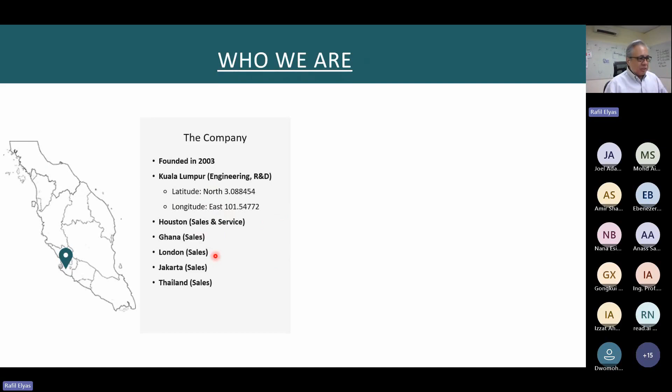We've got agents and partners all over the world. We've got a sales and services office in Houston. You've met Ebenezer, who is from EBL. We've got partners in London, sales agents in Jakarta and Thailand as well for Southeast Asia. So we're a very small niche company. Again, we focus primarily on simulation-based services. We've got about 15 people in the team. About 11 of us are process engineers. The rest are sales as well as general office support.

So our focus areas tend to be within process engineering, particularly process simulation related services. We occasionally do some software development, and we do some machine learning and AI. I like to think that East 101, with our domain expertise, brings some RI into the AI, i.e. some real intelligence to the artificial intelligence. So we do some AI solutions for our customers, but what we bring along is domain understanding and domain expertise in how facilities are operated and designed.

So when we put together our solutions, it's not just doing advanced statistics or neural net type of solutions, but we actually bring in some of the engineering understanding underpinning these AI solutions that we provide. Okay, so just a bit of an overview of some of the work that we do, and you'll see some of these examples very specifically.

For the upstream business, we do quite a bit of controls studies for offshore platforms and FPSOs. We've done quite a bit of work for MODEC, and back in the day, I guess Tullow was managed by MODEC, so we've done a bit of work for the Tullow facility. We've done quite a bit of work for MODEC and Petrobras in Brazil. So there's a lot of FPSO kind of work that we've been focusing on, and it generally is aligned with controls, particularly compressor surge analysis. So we'll be going through one of those examples later.

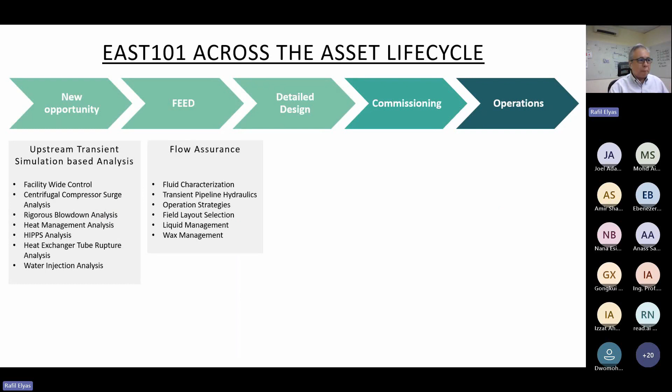I'm just going to run through this real quick because I don't want this to turn... I promise you, this isn't a sales pitch. Just wanted to get you up to speed with some of the stuff that we're doing.

Operational excellence. One of the things that we've been working on quite a bit is machine learning and AI solutions. So we've come up with some AI solutions to help facilities with controls, process controls, primarily looking at flagging and identifying control anomalies. As you know, when you go into a facility, you might have hundreds or thousands of controllers, and you want to be able to identify potential issues, and you can tell by patterns.

If you have, for example, a sticky valve, you have systems where there's a lot of dead time, you have a lot of second order behavior. So as an engineer, as a controls engineer, you can look at that and say, okay, that's anomalous. But try to do that over several thousand controllers, and it becomes quite a task. So we've put together some AI tools to be able to identify anomalous controllers.

And we're going to the next phase where we're looking at coming up with potential root cause analysis to kind of drill down and figure out what's wrong with some of these issues. So it combines some neural net AI with some physics-based model, as well as some real intelligence, some of our many years of experience designing and operating facilities.

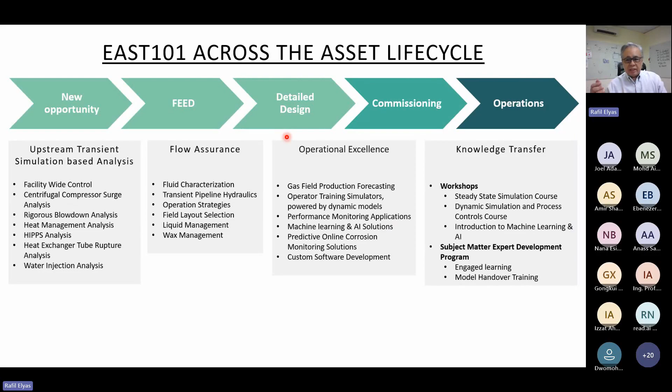And as Ebenezer mentioned earlier, I do a lot of workshops. So we do in-house classes specifically for companies. Occasionally we do public classes. Last year I did a one-day public class open to everyone in Kumasi University. I also teach in a couple of universities here as an adjunct lecturer. That's a bit more theoretical for students.

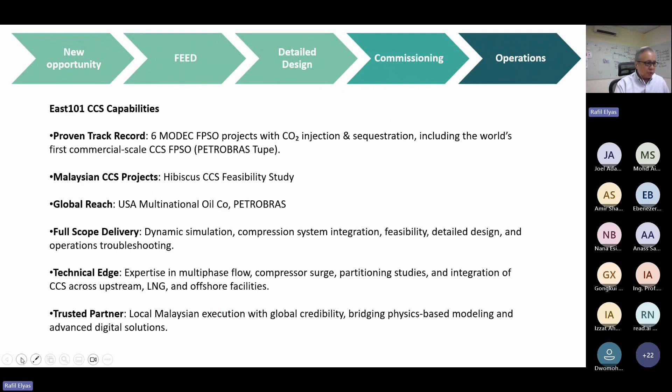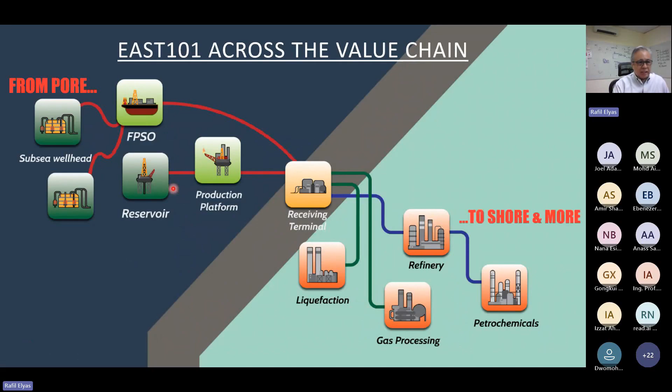With regards to the East101 services across the hydrocarbon supply chain, when I first started my career, I did a lot of work in refining, gas processing, LNG, and petchem. This is back in the 1990s, so you kind of know how old I am. My first job was in 1990 when I worked for Petronas. When I started East101 in 2003, I pivoted upstream because I couldn't really get too much work downstream. So that's where we developed a lot of our experience for multi-phase fluid flow and compression. And lately, obviously, carbon capture and storage.

So today I'll be talking primarily about some of the upstream solutions, but we've actually done quite a lot of work downstream as well. The AI work that we've done is for a liquefaction facility, and we've done quite a bit of work in design and troubleshooting for refineries within Malaysia, as well as refineries in the US and Canada.

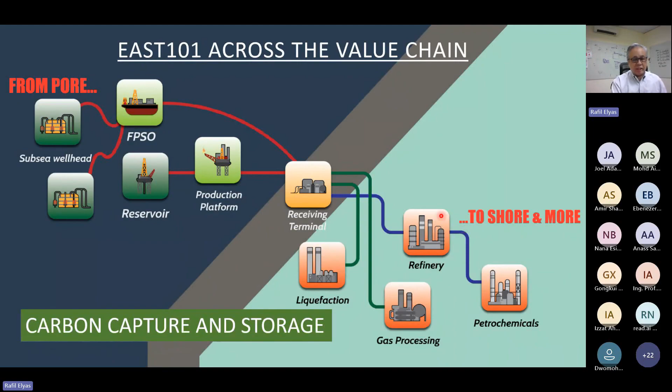Okay, so that's enough of the introduction, and let's talk a bit about some of the engineering technical work that we do. So today I'll be talking about 5 areas that we typically work on. The first, this is pretty much like our rice bowl. This is where we do a lot of our work in. It's centrifugal compressor surge protection and controls analysis. I'll give you an example of what we do there. Heat exchanger tube rupture. This is for shell and tube exchangers. I'll be talking about liquid surge and water hammer protection.

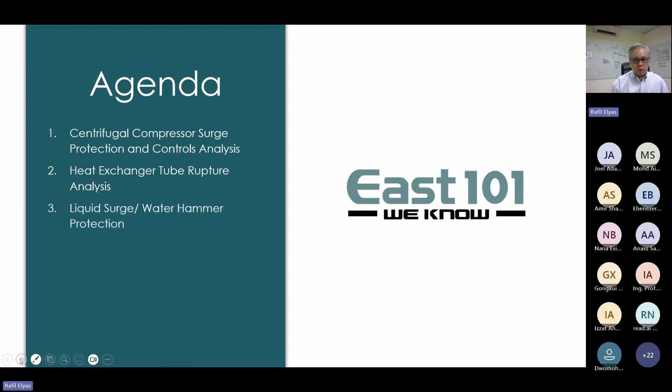Blowdown. So I think most process engineers here have done some kind of blowdown analysis, either using HYSYS or Unisim blowdown, where you actually have to sum everything up into like one volume and kind of blow down that particular volume. In our case, I'll talk about what we refer to as distributed blowdown, which is having the volumes, the pipes, all the configurations, so you can tell exactly where your cold spots are.

And I'll talk about process safety time. This is essentially instrumented pressure control. So a typical one that we normally work on is HIPPS, or high integrity pressure protection systems, or any other kind of instrumented pressure protection control.

Okay. Ebenezer, is everything okay? Can you still see and hear my presentation? Yeah, everything is okay. Okay, I'm going to stop periodically and check, because I've had situations where I got disconnected and then I end up talking to myself for like 15 minutes before I know I'm disconnected.

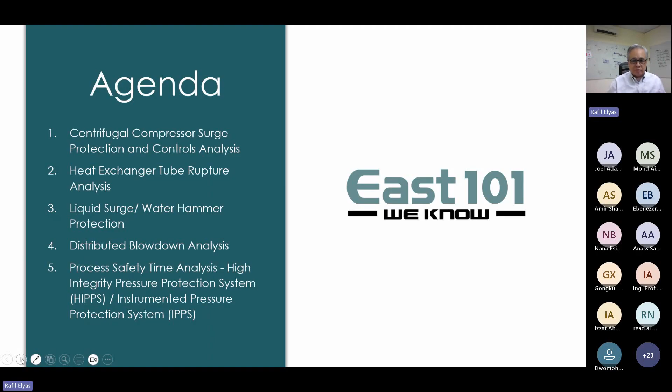So, okay, the first thing I'd like to talk about is compressor surge protection and controls analysis. And again, all of these types of analyses here are done utilizing some form of a dynamic model. Not just within HYSYS or Unisim, but other applications as well. And I'll address that as we go one by one through each of these areas.

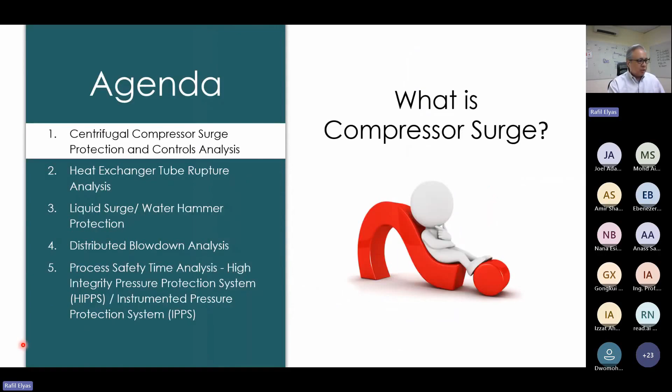Okay, so what do we mean by centrifugal compressor surge? So this is just a quick sketch of the first stage of a typical compression system. And you can see that this consists of piping, an inlet header, in this case, where you might have a PCV to flare. You've got the inlet scrubber to knock out any liquids, your compressor and driver, aftercooler, outlet SDV, and you normally have a check valve over here to reduce your surge volume.

So what do we mean by surge? Well, in some situations, you might find that the discharge pressure may go up. Why would it go up? Well, you could have a problem further downstream. Maybe this is feeding to some other processing trains. Maybe some of the trains have tripped, and it has retarded the flow, causing the increased pressure over here. Could be that maybe there's an inadvertent closure of a valve.

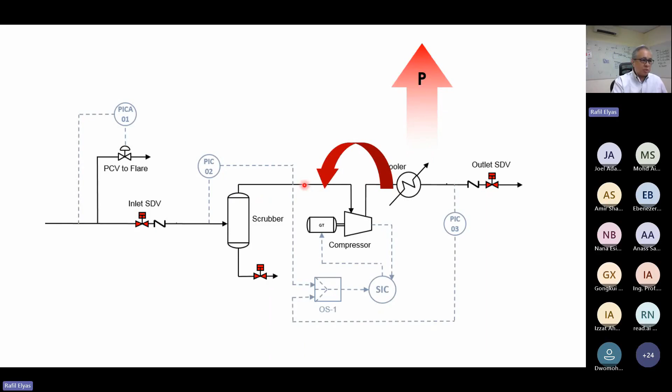So what happens if there's a sudden reduction or retardation in flow? Your pressure goes up. When your pressure goes up, there's a potential for reverse flow. So there's a potential that your gas, rather than going forward, will want to go back. When it goes back, it starts to pressurize your suction, and after the suction gets pressurized, it goes back to the discharge, and vice versa. So you'll have this sort of oscillatory flow.

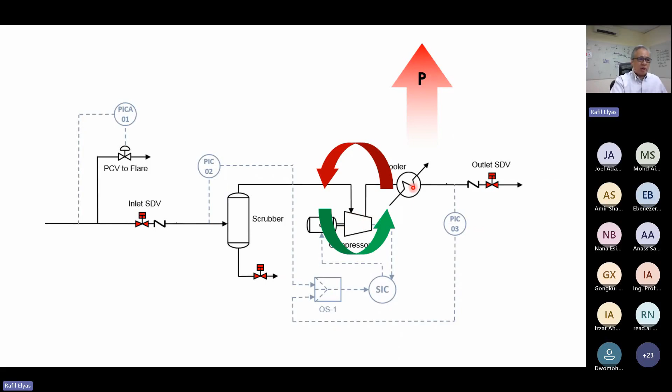Another reason why this could happen is, let's say your inlet flow rate is retarded. Say this is coming from wells and some of the wells tripped. There would be insufficient flow in the compressor. The insufficient flow would also result in this potential issue, where you've got an overwhelming discharge pressure causing a backflow. So this can go back and forth, and this oscillatory behavior can cause mechanical damage.

So what do we do in a situation like this? Well, we need to take a look at certain types of analyses to see what sort of situations may bring a system to surge, where a compressor may start approaching surge. One might be startup or shutdown, particularly if you have an emergency shutdown and you cut the power to your compressor real quick.

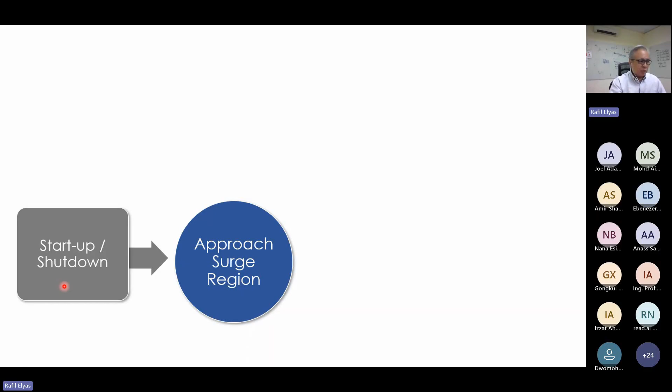You might have sudden variations in demand, like what I said before. Your compressor might be feeding several processing trains. Maybe one train might trip, or some of the trains might reduce in pressure. There might be a turndown. You might also have a situation where you switch compressors in and out of service if you've got parallel compressor trains, or you have two trains and one train trips.

Now, when the surge happens, it can occur within the order of magnitude of hundredths of a second or milliseconds. So you have to be careful in making sure that you have some protection in place to prevent this from occurring.

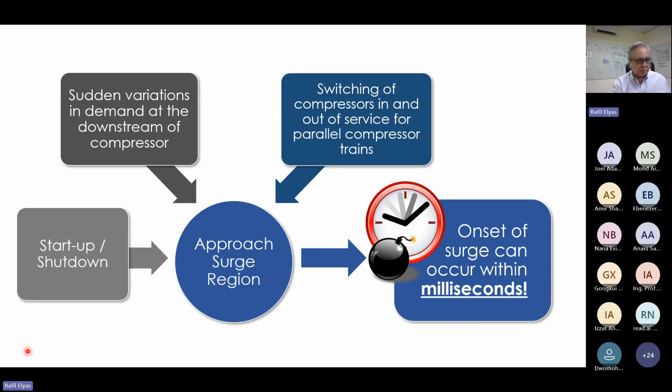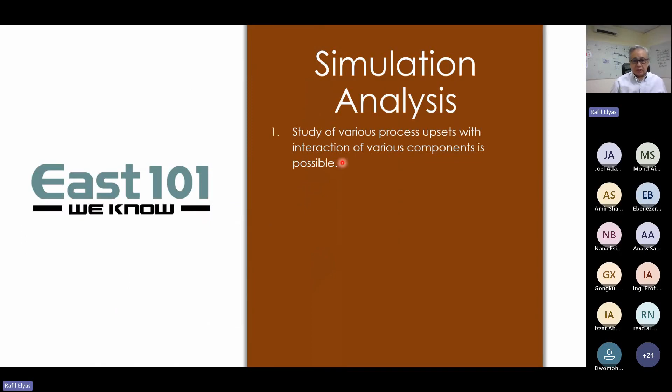Okay, so with regards to the simulation analysis, what we typically look at is various types of process upsets, like what I'd talked about earlier in the previous slide. And we'll take a look at these particular areas. So within all the things that can happen in a compressor, these 3 items here are typically where you might have a potential surge analysis. So we typically set up a dynamic simulation and define these types of events.

You can schedule a bunch of these types of events in any of your flowsheet simulators, HYSYS or UniSim or Petrosim. And we take a look at how well the anti-surge or the surge protection system is designed in order to prevent surge or to prevent any kind of high pressure excursion from occurring.

Okay, so now in order for us to take a look at this, you may be familiar with these compression systems. In order to prevent surge, in order to prevent backflow going through the compressor, you would have an anti-surge line bypassing the compressor and sending the gas back to the suction so you can maintain the flow, smooth activity. Now, there's a couple of questions that people typically ask at this stage.

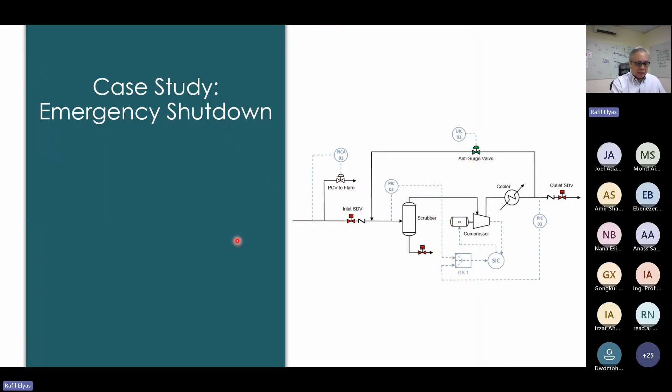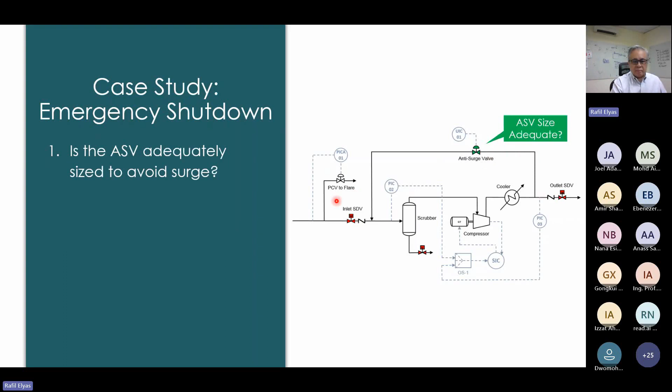One is, this system here, is the anti-surge valve adequately sized? Is the piping also adequately sized? If it's not adequately sized, then do I need to install another valve to allow the flow to come back? So in this case, this is a hot bypass valve. This valve takes the flow before the aftercooler and sends it back. Why is it important? I'll show you in the next slide why we have hot bypasses.

Can I install a hot bypass in order to get more flow back if the individual anti-surge valve is insufficient? It may be sized sufficiently, but it might not be able to open fast enough. And we'll see why that's the case in the next couple of slides. Instead of a hot bypass, maybe I can just have a piggyback or a cold bypass over here.

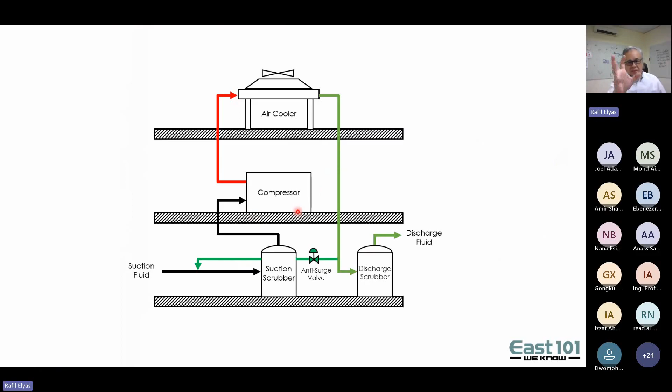Okay, so earlier I just showed you a simple schematic, but if I put this in a very simplified GA, a general arrangement drawing, you can see that sometimes if you're on an offshore facility, your equipment might be on different decks. So your suction scrubber might be on one deck, compressor on another deck, and your hot discharge has to go up. If it's an air cooler, it's normally going to be at the top deck. So it's going to go all the way up and then come back down again. So you've got a fairly long path.

So that's why sometimes you might want to bypass the air cooler and shortcut it with a hot bypass. So a lot of times the effectiveness of the anti-surge system or the anti-surge loop is going to be a function of this arrangement as well as all of the piping and valve sizes.

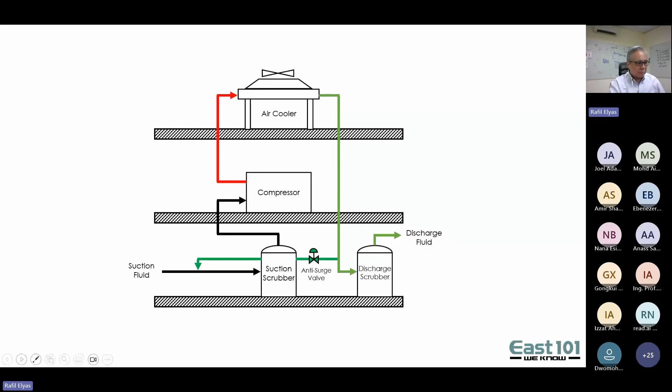Okay, so one of the things that we typically look at in order to determine whether or not we need a bypass is a compressor emergency shutdown. Emergency shutdown tends to be the most onerous case because your compressor is running under normal speed, and suddenly you have a trip, maybe there's a blockage or a system trip or an H2S alarm trips the compressor.

If it's a motor-driven compressor, then you essentially turn the motor off and the compressor just winds down based on its inertia very, very quickly. And as it winds down, it doesn't have enough head to push against the system head, and the system head overwhelms it. So during the emergency shutdown, there is a potential for surge to happen.

And even though you have an anti-surge valve, because the power cuts off very, very quickly, sometimes the valve can't open enough to give you enough CV to have the flow come back. So you have a backup valve or a fast-stroke valve, a valve that you can just actuate very quickly, just open it fully in a short period of time to allow the recycle flow to go back.

So this is an example for a compressor shutdown. I've got some of the details over here in terms of the suction conditions and the discharge conditions. And initially, the proposed ASV, anti-surge valve, size is about a CV of 350. So we want to know whether this compressor is going to surge during emergency shutdown.

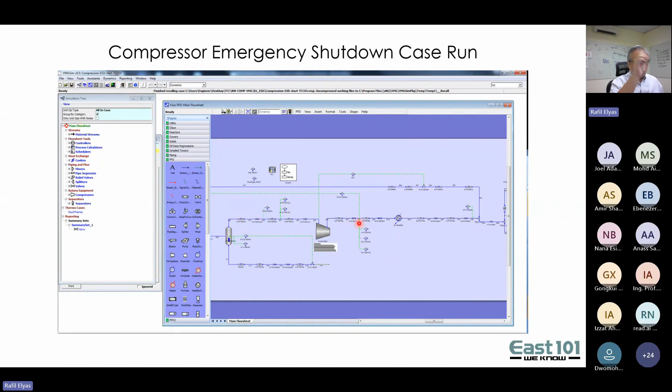So I've got this compressor, this suction scrubber, compressor, valve, and you can see here I've got the aftercooler and anti-surge valve over here. And I've got all the piping modeled. So typically when we do these models, they're very rigorous. We've got all the piping configured. And this is the compressor map. You normally get this from the vendor. So we've tried this analysis.

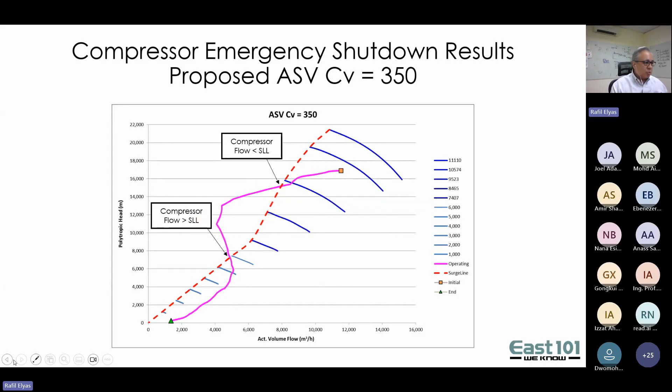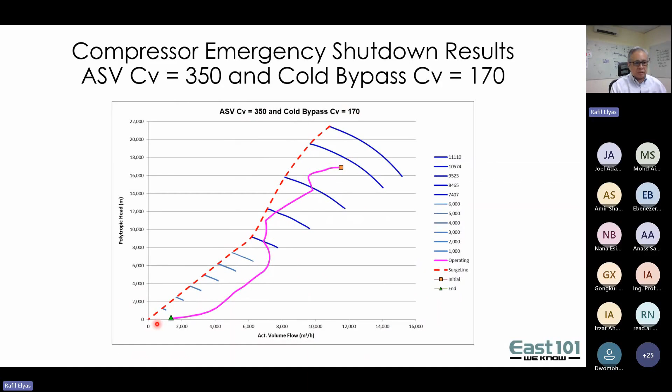So what we've done now is we've put in a cold bypass. So in addition to the 350 CV, we've added another 170, and we find that in this case, that prevents the compressor from entering the surge region. So analyses like these are really important because now you can see a difference. Without the bypass valve, you have a surge, and with the bypass valve, that's able to keep your compressor within the desired operating region as it winds down nicely.

So these simulations have essentially allowed us to get some insight and ensure safety and costs as well by making sure that we prevent the compressor from experiencing any potential mechanical damage and vibration.

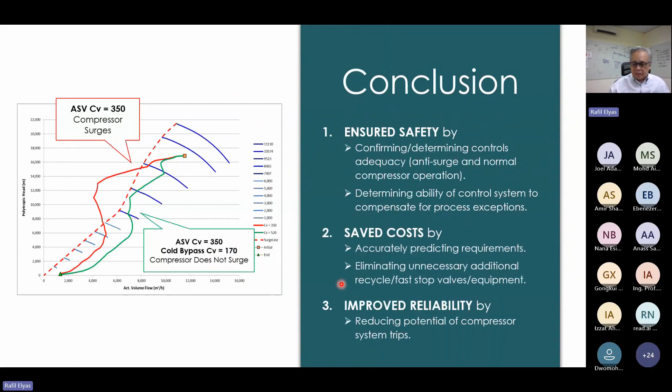Okay. So Ebenezer, is everything okay? Is my audio and visual still up and running? Everything is perfect. We are with you. Okay.

So this is another compressor study that we've done. Sorry, I didn't introduce the previous case properly. That case was for a design case. We did this in a detailed design stage for one of our customers. This next example is for an existing facility. So it's a compressor controls issue. This one doesn't have anything to do with surge.

But what was happening is this is a gas compression module. It's essentially two parallel trains, each with 3 stages: low pressure, intermediate pressure, combine back, go through a glycol dehy, and then into the third stage. This will be going into gas injection and gas lift.

So one of the problems that they saw over here was inconsistent readings for some of these compression trains. You can see that the flows over here seem to be imbalanced. You've got more flow in one, less flow in another, and the flow rate readings were kind of all over the place. So the flows were maldistributed across the compression trains.

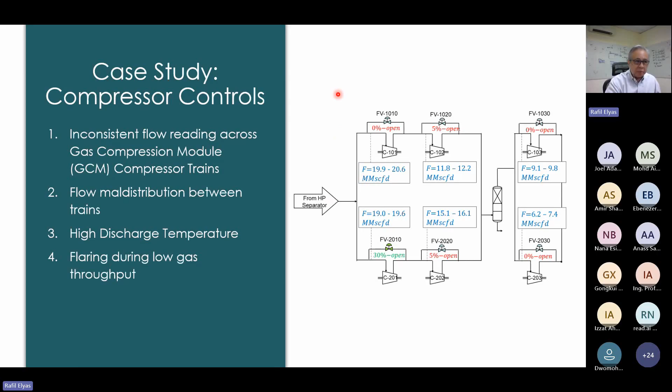And one of the compressors was having a high discharge temperature at this point over here. I think the expected discharge temperature should have been about 140 or so. We were getting up to about 170, 180 at this point. And at the suction header, even at a low gas throughput, we're getting a lot of flaring taking place. Yeah. Okay.

Now, again, we built the simulation model. This was coupled with the offshore site visit. So the engineers went offshore, took a look at some of the setup over there, and made some observations. Had some ideas and hypotheses, and came back and tried running those hypotheses through the simulation model.

Yeah. So for the simulation analysis, we had 2 offshore site visits, got a lot of data from PI. Then we made some observations offshore. Then onshore, we built a rigorous dynamic simulation, validated it against the actual design of the facility, and based on that, we can see what the system was designed for and how it was currently performing. So we could use that to identify certain gaps. Yeah.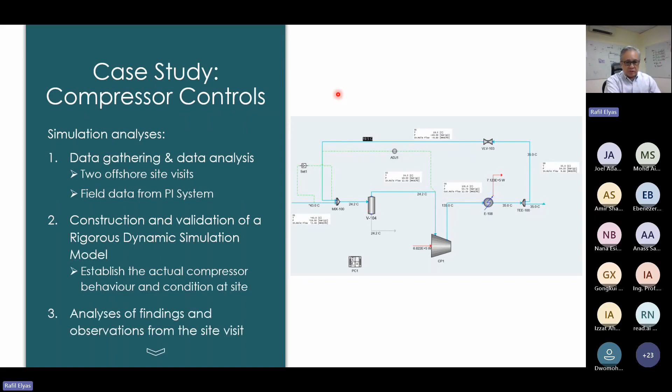So we then performed analysis of the observations from the site. We also did a bit of anti-surge analysis, but that wasn't really much of an issue in this particular case. Yeah. So here's a finding that we got. One of the reasons that we had maldistribution between the trains was one of the anti-surge valves, even though it showed it was closed, it was actually passing. We noticed that on the discharge of the valve, the piping, there was condensation, which indicated there's flow because you get a Joule-Thomson effect. From high pressure to low pressure, it gets cold, and the piping was cold, and that's a bit odd. So we shot it with a temperature gun.

So we're in Malaysia. The temperature is about similar to Ghana. That's one thing I noticed when I went to Ghana. The conditions, the humidity, was almost exactly the same as Malaysia.

So the ambient temperature is going to be about 30 plus degrees Celsius. But when we took a look at the discharge of the ASV valve, which is supposed to be closed, it was about 12 degrees Celsius, and there was condensation around it. So we found later that the ASV, the anti-surge valve, was passing. Even though the indicator showed that it was closed, it was passing, and it was causing a recycle to occur in one of the trains. So it was retarding the throughput of one train, so there was more throughput going through another train. So that caused a lot of the imbalance.

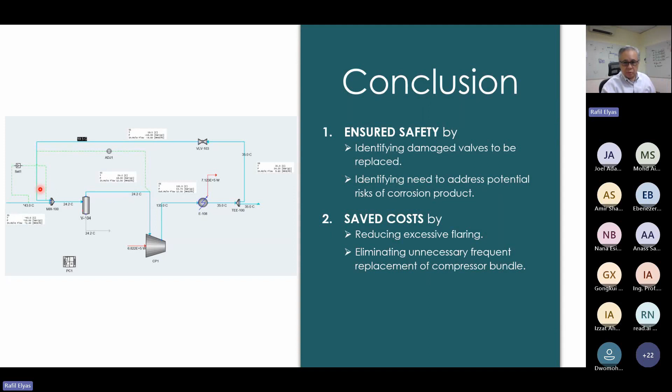Yeah. So we essentially identified the damaged valves to be replaced, sent that out, and wrote a report about the corrosion. Initially, the CO2 levels were supposed to have been lower for the system. So the material that was selected, carbon steel, did not have the resiliency to deal with corrosion. So the other solution, albeit a very expensive one, was to change out certain sections to prevent corrosion. Yeah. So this is one of our operations troubleshooting cases. Yeah.

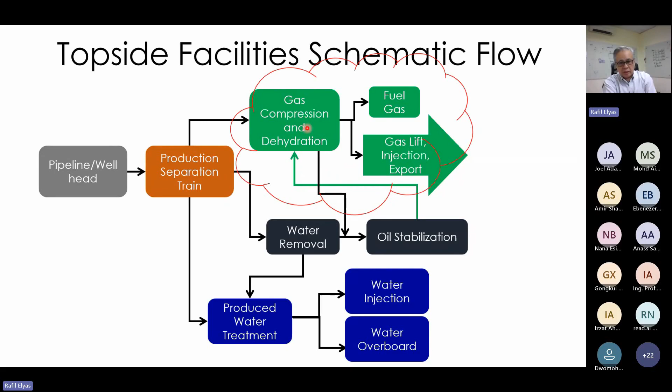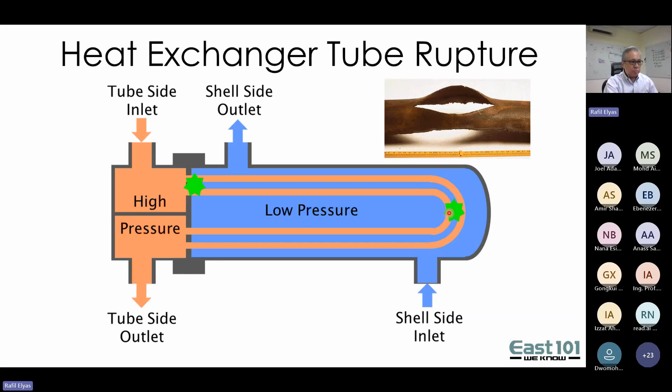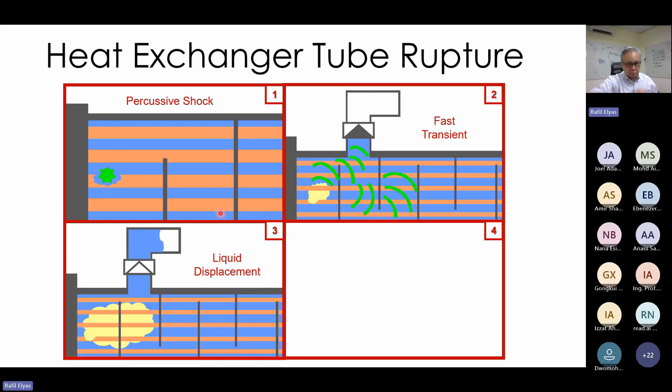Okay, so if you take a look at the dynamics of a tube rupture, the first thing that happens is you see a percussive shock. As soon as it breaks, you've got your high pressure suddenly entering a low pressure system. That percussive shock generally is extremely fast. You have a pressure wave that travels at the speed of sound in whatever liquid you have. And that high pressure is followed by a liquid displacement and later by gas breakthrough. So when you're designing these relief systems, you need to take all of this into account.

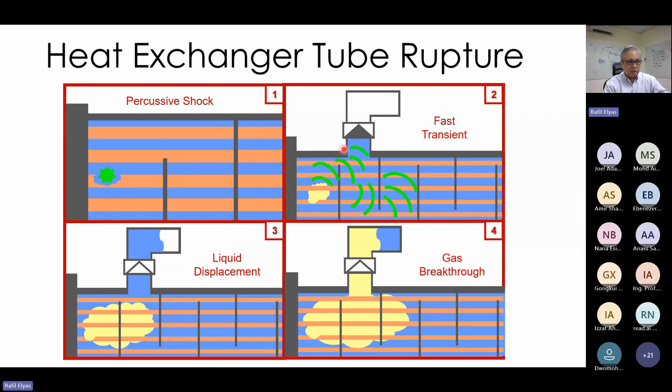The fast transient, how fast is this? Can I use a relief valve? Do I need to use a bursting disc, or can I use a buckling pin configuration? All of those have different transient responses associated with them. What kind of protection can I use? How big is it, and where do I need to place it? At the inlet, near here or farther down?

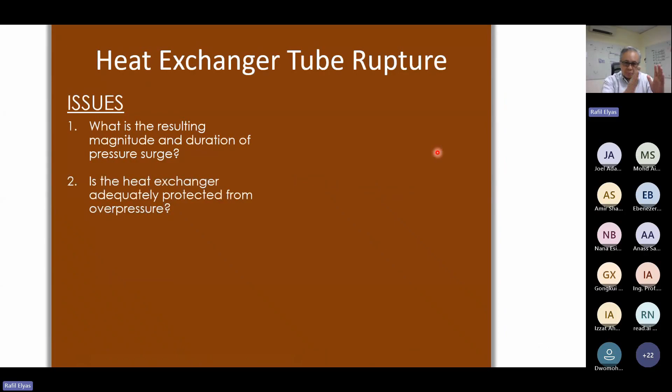Okay. So the first thing we need to know is the resulting magnitude and duration of the pressure surge, and where in the shell does it occur? We want to look at the pressure profile as it traverses the shell. We want to know if this heat exchanger is going to be adequately protected from overpressure, and will this also cause issues with the inlet and outlet piping? So what kind of analysis do we need to do?

Well, we need to do a transient single phase hydraulic computation. And you can't use HYSYS or UniSim or PetroSim or Symmetry for that, because even though it appears that there's some sort of pressure flow interrelationship in dynamic HYSYS, it doesn't include the momentum balance component of the Navier-Stokes equation. If you're using HYSYS, UniSim, Symmetry dynamics, there's only two parts of the Navier-Stokes or Bernoulli equation that are taken into account.

One is the pressure drop driving force, frictional pressure drop: F equals K square root rho delta P, friction or 1 over friction, which is conductance. And elevation, H rho G, static head. But it doesn't take into account the kinetic energy terms or acceleration terms. So you can't use HYSYS for something like this. You need to use a single phase tool like PipeNet or AFT Impulse.

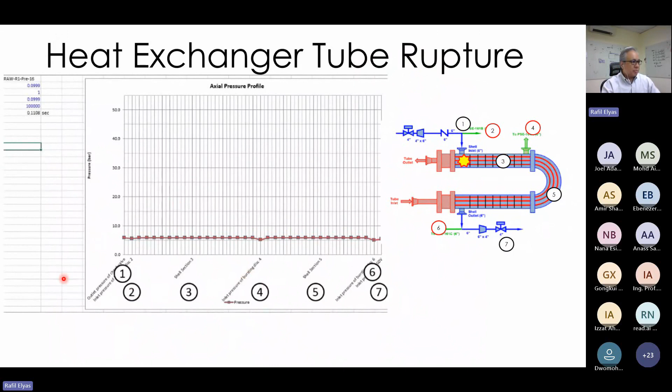So I've got relief valves placed in various locations here as well. I've got a bursting disc. And this simulation happens very fast. If you watch this timing, it's happening within less than a second. So let's see if I can run this animation.

Okay, so I've induced that. You can see the pressure start to move up, and the pressure wave starts propagating across. So it's now the time, it's a really small thing. It's less than a second happening. And you'll see the bursting discs start to lift at some point in time when the pressure reaches that point. Yep, that's lifted, that's lifted, and that's lifted.

So now the pressure wave is going back and forth. You can see again the timing. This is less than a second. That's about a tenth of a second. You can see the wave traversing back and forth across this. You can't see this in HYSYS. So you need to use this kind of tool, or you need some kind of CFD-like tool. You can consider this like a one-dimensional CFD. So that's a wave that's just gone back and forth, yeah? It's just single dimensional, just axial computational fluid dynamics. Okay.

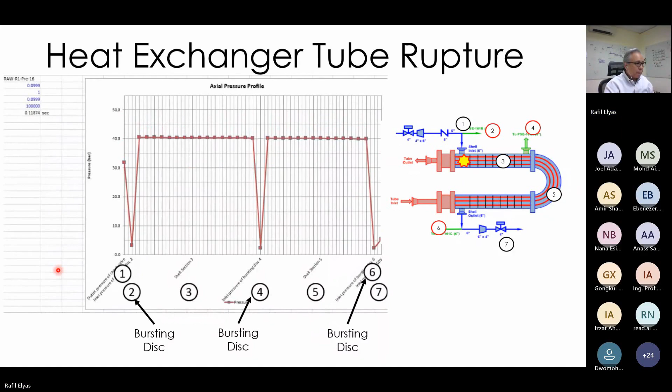So this is what we were looking at from this analysis. We had like a buckling pin valve over here, and one located over here. So initially, in terms of the sizes, we're looking at a 6-inch, and we found that with the 6-inch system, we had some issues. It was not acceptable. We were actually going past the maximum allowable working pressures.

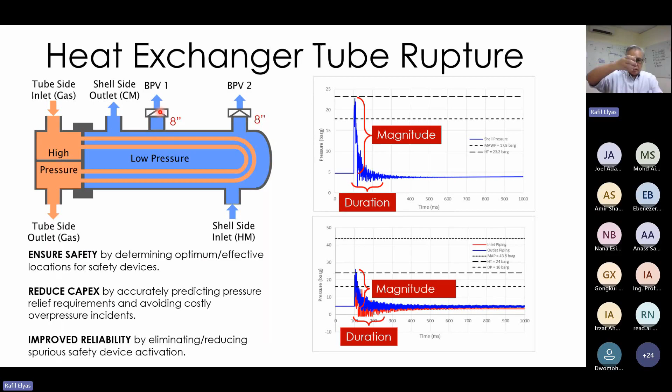So what you get again from a dynamic simulation is magnitude and duration. How much and how long is it going to occur? So by having this, we've been able to determine where we locate these relief devices, and it takes the guesswork out of it, so you can actually manage your capex properly. We also tell you how far these discs, the relief devices, need to be away from the shell. Okay.

Ebenezer, we doing okay in terms of visuals and audio? Yes, I have a question in the chat. I don't know if we would address it now or after. Yeah, I think I'll run through everything and then we'll address the questions.

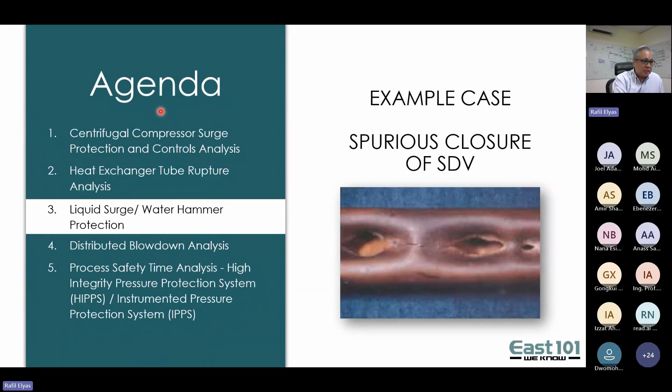Okay. So the next analysis that we did was a liquid surge and water hammer case. And this was for a design case. So again, this is not using HYSYS. For something like this, you have to use PipeNet or AFT Impulse. So in this case, I've got a pump and a piping system. We want to know whether you're going to get liquid surge occurring during transient events: startup, shutdown, sudden valve closures, etc. If there is a sudden pressure surge, is it going to be significant relative to the pressure rating or the flange rating of the system?

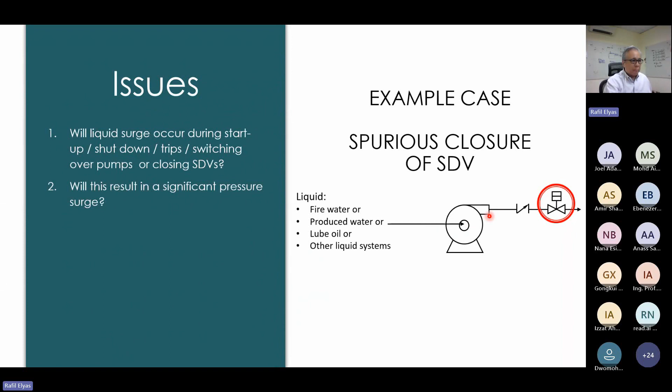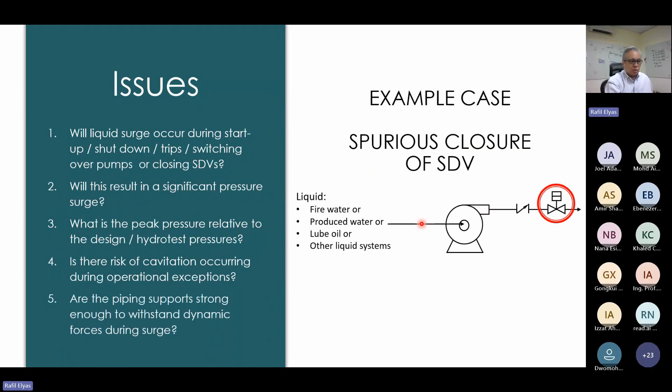So again, we want to know what's going to be the peak pressure relative to your design or hydrotest pressure. Another thing we want to know is there any potential risk of cavitation during the transients? So when I'm starting up, do I have enough NPSH over here to prevent cavitation from happening? I want to prevent the pressure from dropping below the vapor pressure of the liquid. When you have cavitation, you start getting pump vibrations and you trip typically. If there's any kind of pressure surge, are the supports going to be strong enough to withstand the dynamic forces?

So in this case, we've done these cases for fire water, produced water, lube oil, LNG loading. So the issue, you could have a sudden closure or some kind of transient. Typically, you can use some hand calcs, a rule of thumb, to figure out what kind of pressure increase you're going to have, assuming that you have some information on the speed of sound in that particular liquid and sudden deceleration.

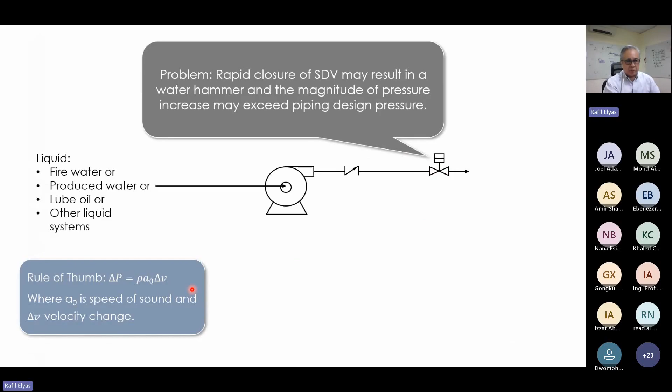So I think a lot of companies will have a lot of spreadsheets, and that spreadsheet will essentially, I think it's a Joukowsky equation, tell you how fast or slow you need to close a valve. And that'll give you a first pass analysis. But later, as your system gets more complex, you might want to have a proper dynamic hydraulic analysis.

So in this particular case, for something a bit more complex, we've got the pump curves, the piping configuration with isometrics, valve data, and we actually shut down the valves, open, close the control valves, switchovers, and things like that. And we take a look at the pressure, potential pressure surges and pressure increases across the system.

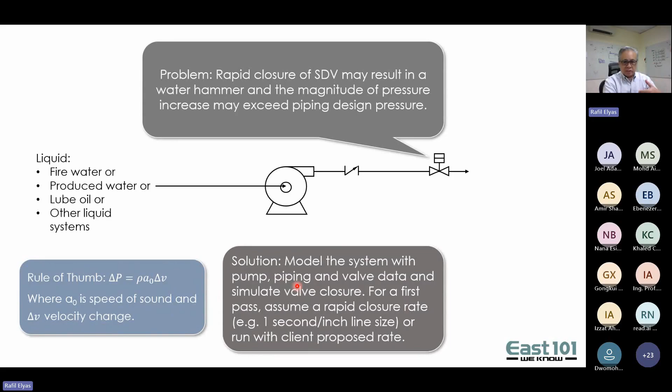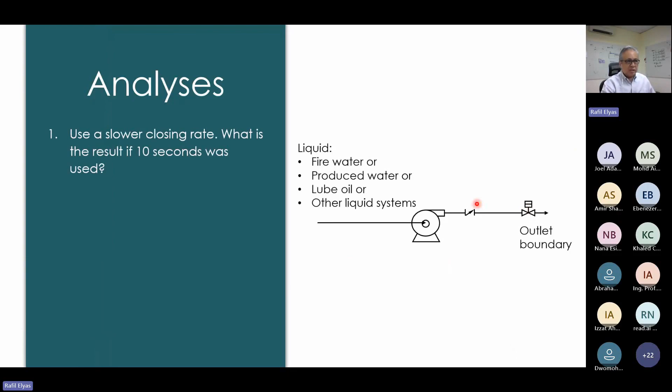So in some examples, if you have a closure and you want to prevent this system from potentially surging, we take a look at what are some of the limits that we can have on the valve closure. If we have a different valve trim, say, for example, linear valve versus equal percentage valve, it's the opposite of a quick opening. It's a quick closing valve.

So in some of the cases, we might have to take a look at the stroke time of the valve. In some cases, if we have an issue, we might have to resize some pipes. We had a recent case where unfortunately we had to go back to the customer and say that we've got some issue on the sizing. We've got some liquid surge issues. We need to revisit the pipe diameters for certain sections.

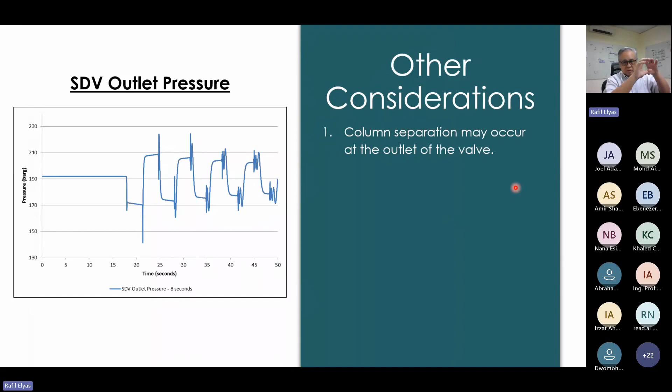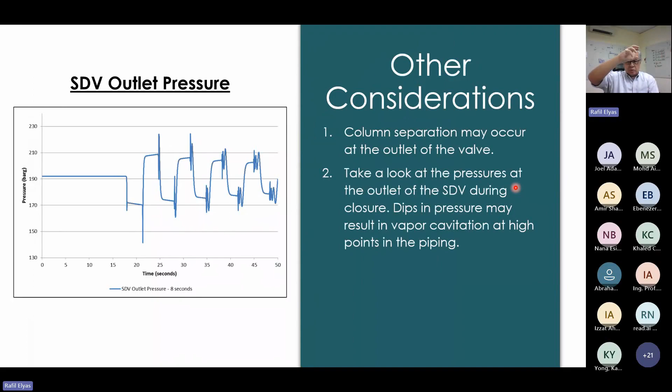So what are some of the other considerations? Sometimes, particularly if you've got overboard dump valves, which we see in a lot of the offshore facilities, as the liquid starts to go to the overboard dump, you might get the liquid separating because of the siphoning effect. And the siphoning effect might cause essentially vapor pockets to occur. And that could also result in vapor cavitation on some of the overboard dump valves.

So I've got a lot of friends who sell valves for a living, and this is something that they're always complaining about, the cavitation on the overboard dump valves. So how do we know what's going to happen? Well, again, we built our simulation using something like PipeNet or AFT Impulse. On PipeNet, you can track cavitation to different degrees of rigor.

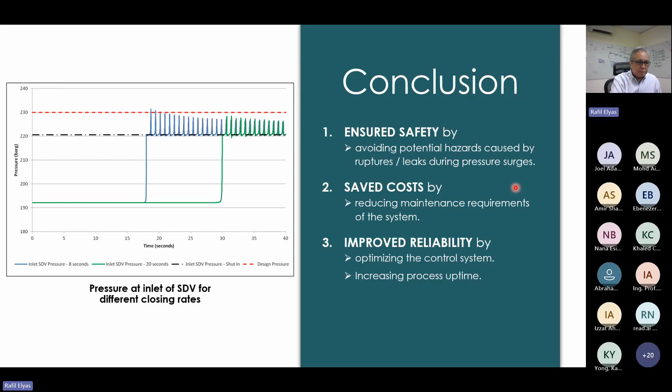So if you use these kinds of transient single-phase liquid systems, you get to avoid a lot of these hazards, and you get to save a lot of costs, reduce your valve cavitation, make sure that you can have proper startup, reduce equipment vibration, etc. Okay.

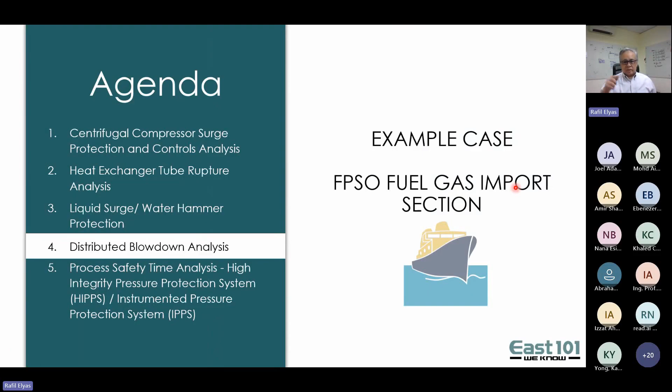So this is another case. This is distributed blowdown. I think most people are familiar with lumped blowdown analyses that they typically have in HYSYS. This distributed case we'll get into. So this is for an FPSO system with a turret and a fuel gas import. In this case, they were importing fuel gas from another facility. I can't remember how far it was.

So if we take a look at FPSO, I think if in Ghana, there's a lot of people working the FPSO business, MODEC, Tullow, etc. And in this particular design, this has a turret. So in this case, it's a rotating turret mooring system. So we have these swivels over here. These swivels essentially provide an interface between the subsea pipes and the topside facility piping.

So what I'm going to look at is the fuel gas import line. I've got the subsea pipeline coming in, the import line going up the riser through the swivel. So this would be one of those toruses that you see here. And going through a superheater and through the fuel gas metering system and then into the fuel gas system.

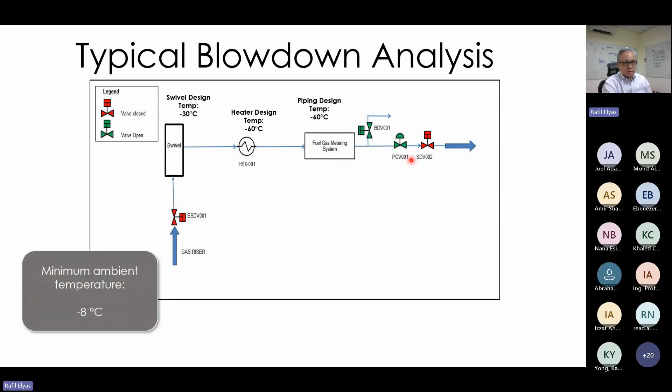So if you take a look, these are the design temperatures. Coming up from the gas riser, the swivel has a design temperature of minus 30 degrees C. But everything after on the topside, after the heat exchanger, is all low temperature carbon steel, so it goes down to about minus 60. Now the minimum ambient temperature is about minus 8. So this was actually somewhere in the North Sea.

If we take a look, the swivel structure is quite complex. You've got certain sections thicker, certain sections thinner. And obviously this impacts a lot of the heat transfer.

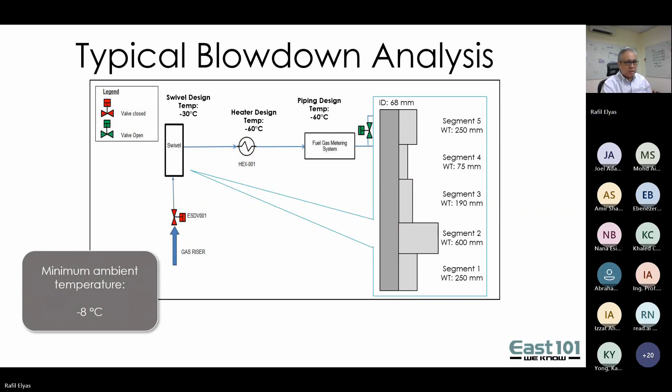So what people typically do in traditional depressuring, if you're an EPC company and you've done any kind of depressuring, is you normally would lump this in a single volume. So you sum up all the volumes, add it to a volume, take a look at the thickness, figure out what is the most conservative thickness, and come up with a metal thickness over here and try to conserve the mass.

So if you're using the tools in HYSYS or UniSim, there are some fudge factors that you can put in to make sure that you conserve the mass. You can add on additional terms and various kinds of lumping tools, so you can lump all of the system here, all the piping, heat exchanger, tubing, etc., into a single volume, which has a single heat transfer area and a single metal mass.

So when the customer had actually done this analysis, they found that everything was essentially settled out to ambient conditions. So it was a shutdown, and everything lined out to about minus 8 degrees Celsius. When they ran the traditional depressuring, the lumped depressuring, they found a minimum fluid temperature of minus 41 degrees Celsius. So this was a bit disconcerting.

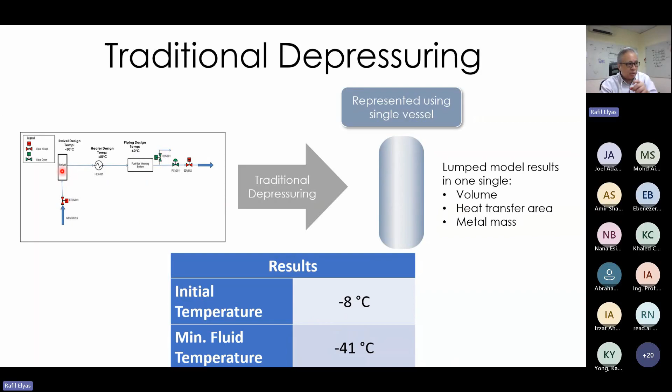Obviously, the inner wall temperature may be higher than minus 41, but this was a bit disconcerting because it's just like a single lump. And you can see that thicknesses are going to vary across here. And if you lump everything together, you can't really tell where that low temperature spot is. If it's happening around here, I don't really care so much. But if somewhere around here, around the swivel, I'm getting minus 41, then I have some issues.

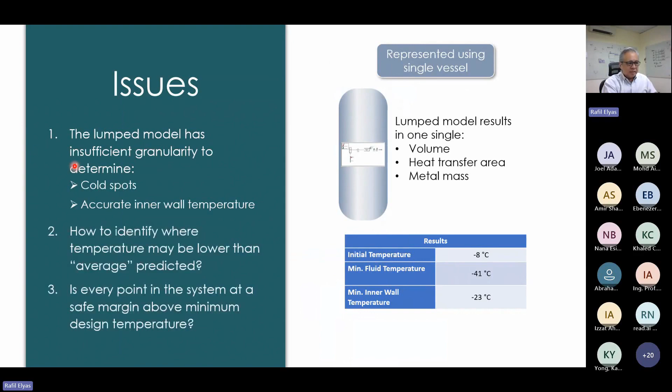So you can't find out where the cold spots are. You don't really know what the inner wall temperature is. So it's difficult to determine whether all the points there are above the safety margin, above your design temperature. So what we did was a distributed blowdown analysis. We actually built it component by component in HYSYS.

Now you're thinking, HYSYS Dynamics, the native tools aren't really set up for rigorous heat transfer. But there's one thing that you need to understand in HYSYS. Each HYSYS object, the pipe objects, the stream objects, are actually programmable. You can customize them. You can actually treat HYSYS like a very expensive MathCAD. So using Visual Basic, we modified some of the heat transfer equations in the piping and the vessels to include rigorous heat transfer models.

So for convective heat transfer, free convection, forced convection, we'd added all of that detail inside. We'd also included a finite element analysis code to look at the wall thickness. So this is all customized. You're not going to find this in any of the commercial software. This is all written by myself and my team. So we have every single piece of piping in there, and the walls were modeled rigorously with our own code. Based on that, we can look at the temperatures, and then we can check the valve sizing as well.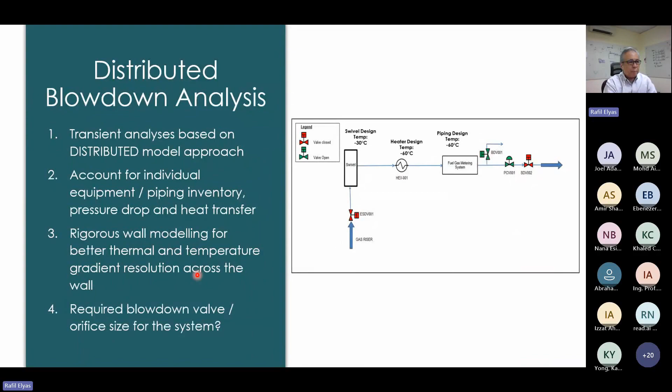Okay, if I take a look at this case, I look at the axial temperature profile across here. So I'm starting off at point 1, 2, 3 all the way up to 8. I'm starting off at minus 8 degrees Celsius. So I have everything shut down, and I'm doing an isochoric settle out at minus 8 degrees C. So I'm letting the system shut down from normal operations, let everything equilibrate to minus 8 degrees C, let the pressure internally equilibrate as well. And let's take a look at what's happening.

So I've got two graphs here. One is inner wall temperature, the other one is fluid temperature. And I'm calculating it for all of these points. Bear in mind, as I mentioned, it's using our own rigorous heat transfer routine. So you can see the depressuring starts. My liquid inventory temperature starts to drop, but the metal temperature still remains above because it's a thermal reservoir. It's still warm. You've got the heat capacity of the metal.

And you find that this is the spot which looks like it's going down to about minus 41, which is actually at this point here, around point 4, point 5. So this temperature is dropping to close to minus 40, but because there's a lot of metal mass around this point, because it's around the heater section, the inner wall temperature is still pretty high. I don't have any issues there. And I'm seeing that over here. I have enough thermal mass to prevent the temperature from dropping too low.

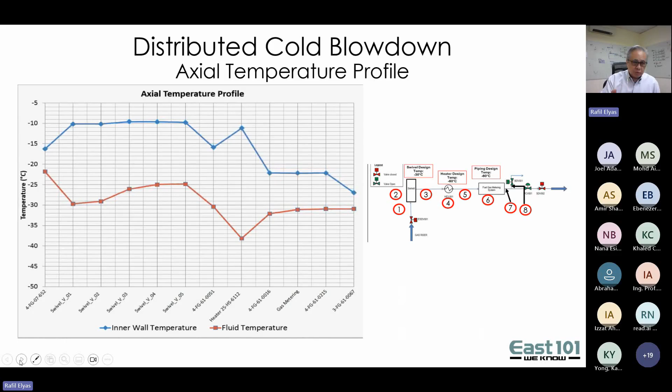So at this point where this is minus 30, I'm pretty safe. I'm way above minus 20 over here. This point where it's minus 60, again, I'm pretty safe here as well. So now you've got some peace of mind. You know where the cold spots are. You don't have to worry too much about having any potential cold spots or fatigue.

Now, another thing that you want to do is to take a look at the cold area to find out the heat transfer across the wall. So for this, I wrote a finite element method. HYSYS doesn't have a finite element method, so this was our own code bolted into HYSYS.

You can start off at minus 8. So I can see the heat transfer going across here. And I start the sim. So this is the fluid temperature dropping, but you can see the metal is still warm. Yeah. As you can see, the fluid starts removing more heat, and slowly this temperature gradient will start to reduce. And you can see that the outer wall also starts to drop.

Now here's the interesting thing. So the outer wall is at minus 8 degrees C. So at some point in time, it starts absorbing heat from the wall, and you start seeing this temperature start to climb a little. Yeah. Now it's kind of dropping because of the rapid depressuring effect. Rapid temperature drop, but now at some point it'll start absorbing heat from the surrounding.

You'll see this start to slow, and you'll see this temperature start to climb a bit. You can see, yeah, so you can see everything start to come up a bit more. Yeah, so it stops about here. This temperature drops a bit, and then it blips up. Okay.

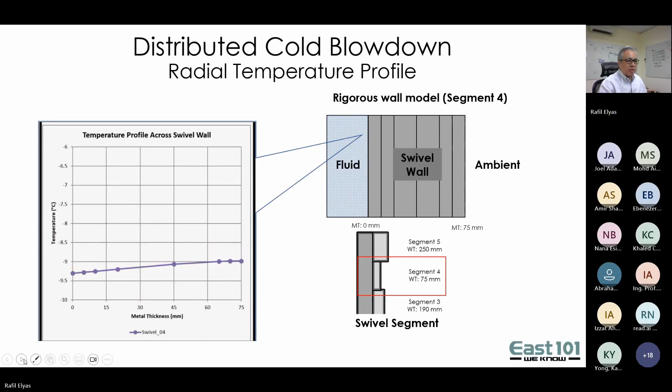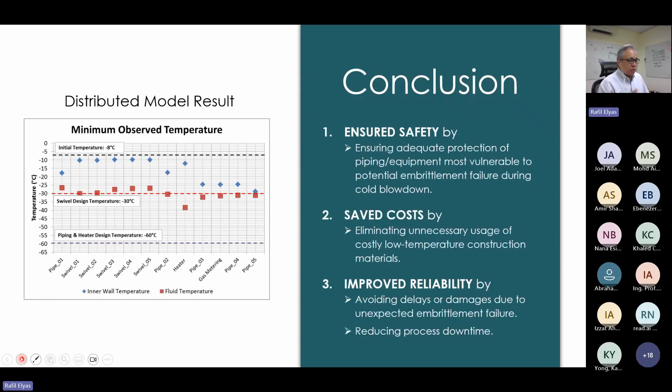So if we take a look at the distributed model, we find that we're pretty safe over here. Yeah, we don't have any issues. Swivel design temperature, these blue spots are all above, no problem, as well as further down. Okay. So we're able to put our customer's mind at ease with the system, with this distributed model as opposed to a lumped model.

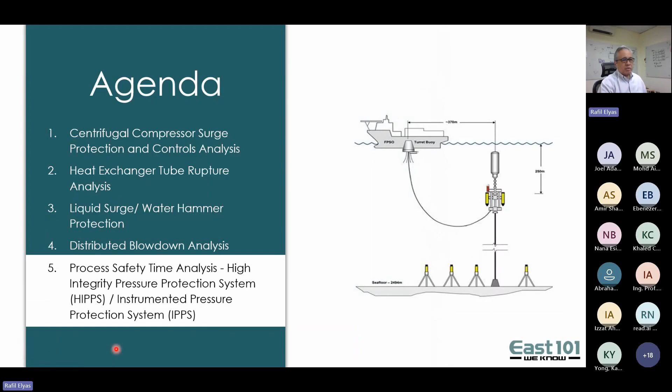Okay. So let me run through the last one. This is for process safety time or a high integrity pressure protection system. So in this case, again, this is for an FPSO. So what happens is a lot of the piping around the transmission or the subsea lines are for a higher pressure rating compared to the topside. Yeah. So we normally have a spec break over here. Sorry, a pressure rating break. Obviously, because your wellhead pressures are operating a lot higher.

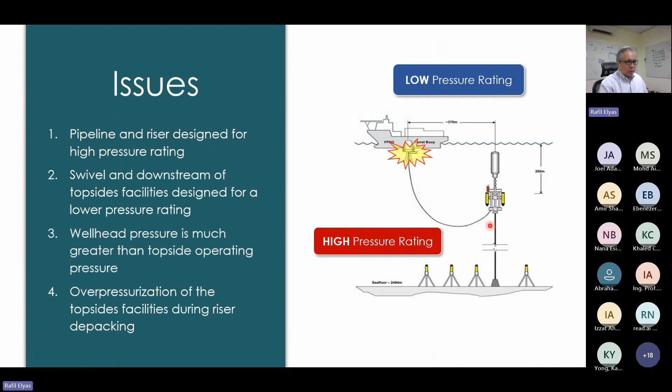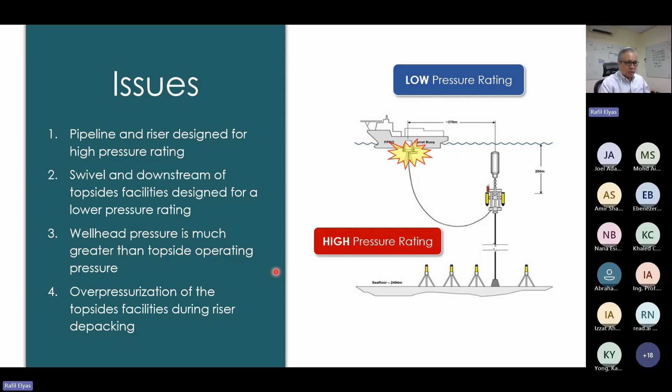So in some cases, let's say if you had a shutdown and you restart the compressor, as you restart your facility, sometimes what happens is within this riser, when you shut down, all the liquids will go to the lower points, and you'll find a gas-packed riser. So this gas-packed riser will be at a high pressure. When you start up your system, or if you open your valves over here, you might get a sudden overpressure during when this riser starts to depack.

So this computation is a bit more straightforward. So we take a look at the peak pressure developed in the worst case scenario. We want to find out how much time we have for the instrumented pressure protection system to activate. We want to know what the set points are, and we want to know what the minimum stroke time for the instrumented pressure protection system valve is. If you have a HIPPS valve, the normal stroke times are going to be about 3 or 4 seconds. Yeah.

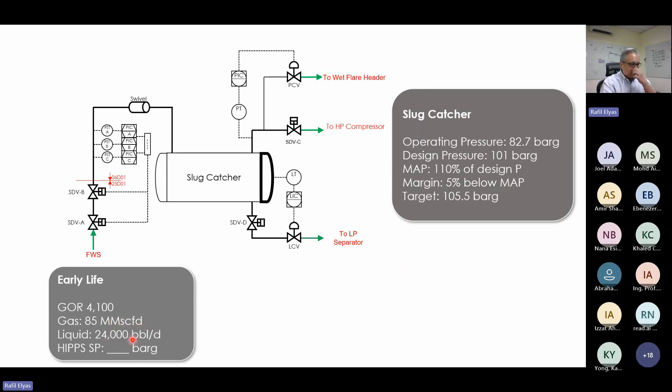So this is the system at early life. So GOR is about 4,100. Gas is about 85 million scf. Liquids about 24,000 barrels. And we want to know for this, what's the HIPPS set point? Later life, we have higher GOR, higher gas flow. So obviously, in these kinds of systems, your pressure is transmitted by gas. So the more gas you have, the faster the system is going to pressurize. Yeah.

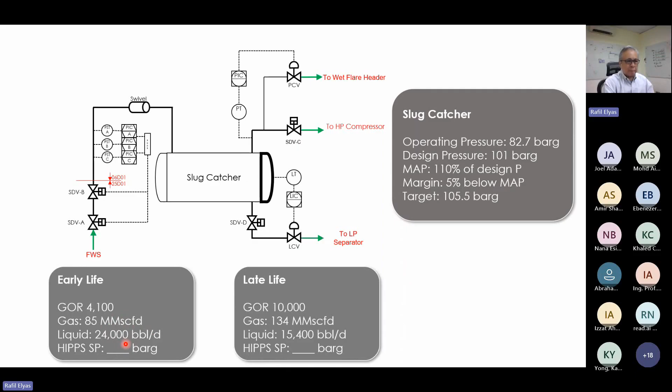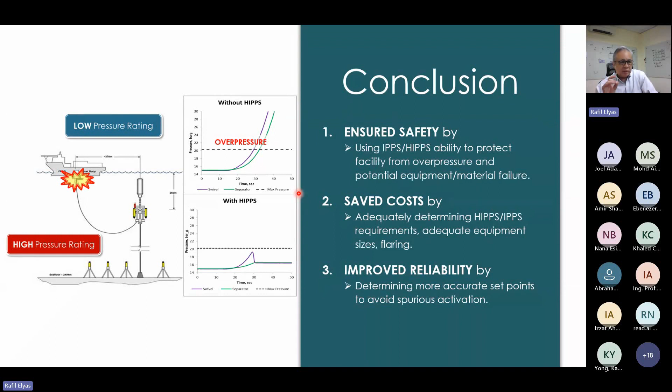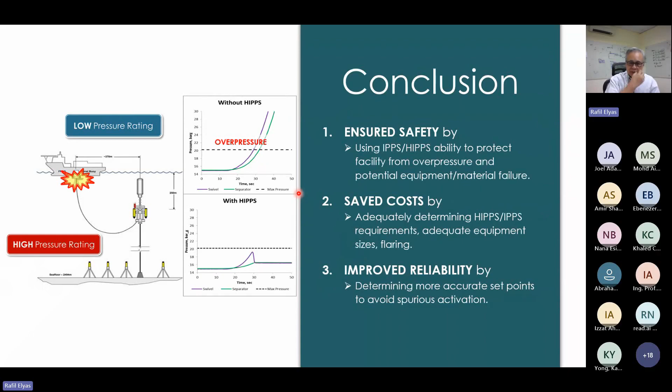One is what is the safety time? How long do I have in order for this valve to react? And another thing that we determined is what is the accurate set point. Because if we put the set point too low, you might get spurious trips in the system. So yeah, that's all that I have.

I thank you for your patience. I hope you managed to get a rough idea or some appreciation for some of the types of problems that one can address using dynamic simulation. So in this example, I had two different types of simulation. One is the HYSYS or flowsheet simulator type, which you typically use for gas-dominated systems, topside facility gas-dominated systems, or mixed phase systems where you have enough compressibility in the system, where momentum effects aren't really that governing, and liquid-based systems where you use something like PipeNet, where you're concerned about momentum.